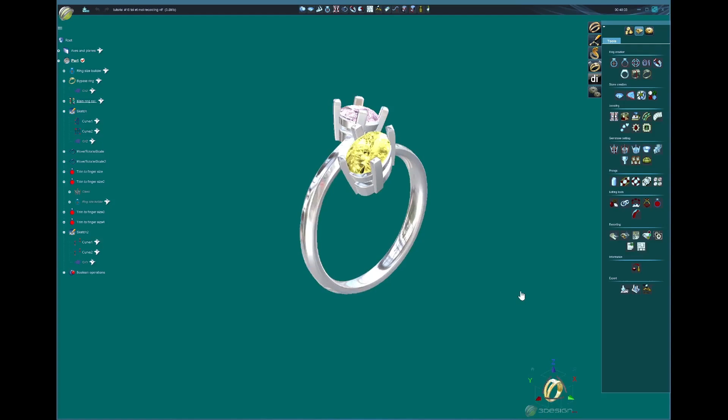Guys, welcome back. Today we're going to design this beautiful twist ring in 3Design. It's a quick and easy project, and along the way you're going to use prongs, rails, ring size builder, bypass ring, and stones. So let's dive in.

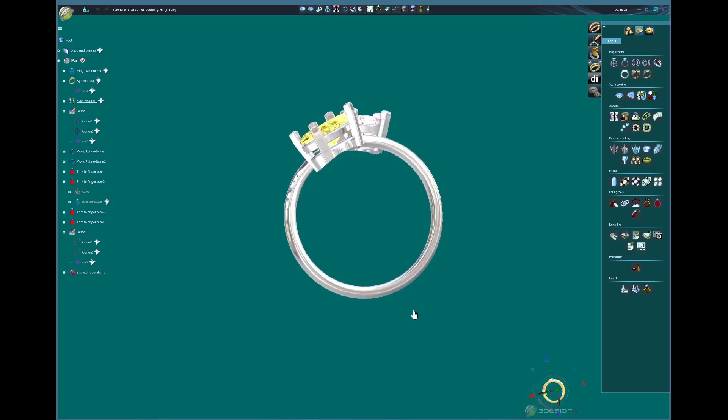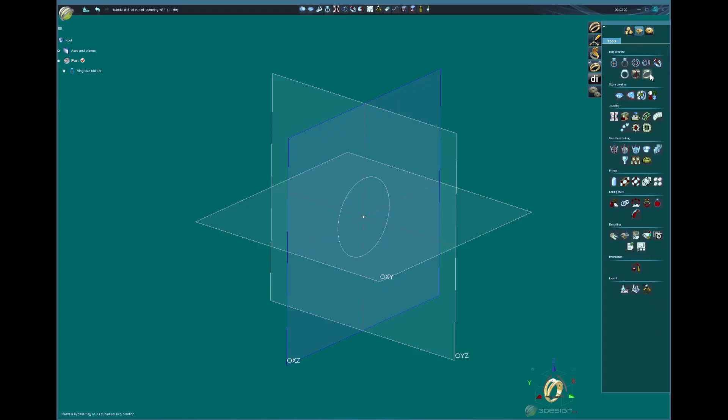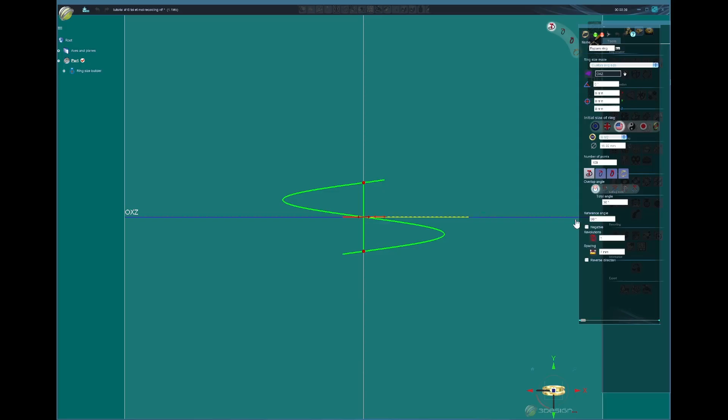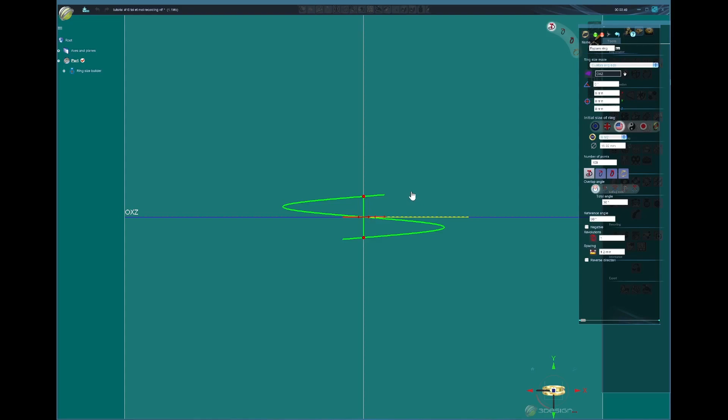Okay, so for this ring we're going to use size 6.5, no top. You click OK, and also in the same plane we're gonna get one bypass ring, also 6.5. It's there for us. And for this bypass ring you're gonna work a little bit on it. In the first step you're gonna bring this a little bit inside, around there, and slightly there.

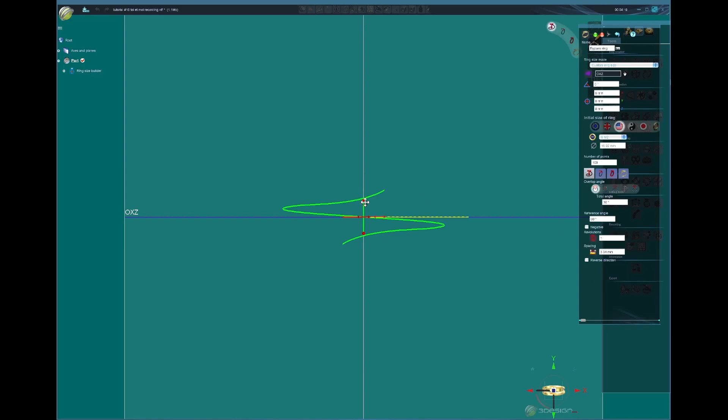In the second tab we're gonna do bending on the end, and we're gonna bring this to make a curve inside and bring a little bit outside. Let's bring this bending a little down. I'm gonna close this a little bit more. We can always open if you need, but for now let's leave it this way. Let me go back here, bend a little more. And I think it's good. And we'll click OK.

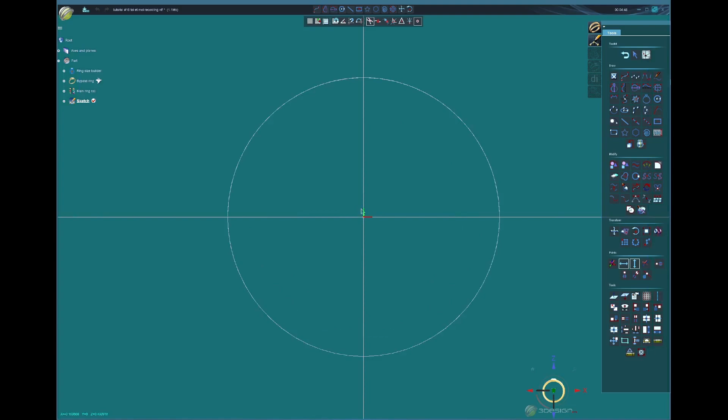So now let's go to this plane, and you're gonna make the profiles for the shank and for the rails. For the shank, I want something like, not a knife completely, but you know, a little bit angled and comfort fit. It's too much. Let's bring it down a little. About there. I think it's good.

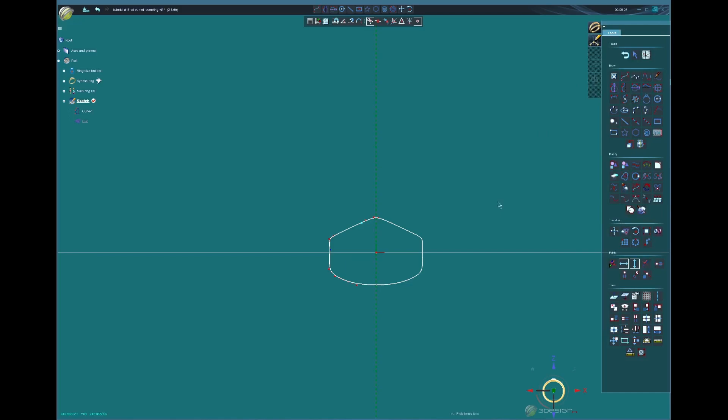Click OK, and also in this tab, let's make the profile for the prong. Sorry, for the belt. I want something a little curved like this. There we go. Okay, now click OK, and you can get out of here.

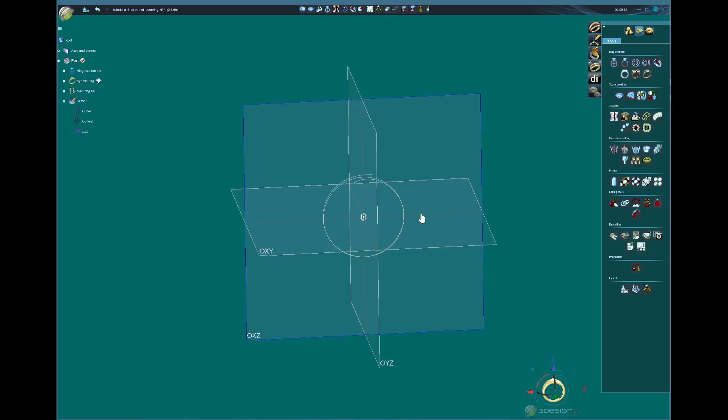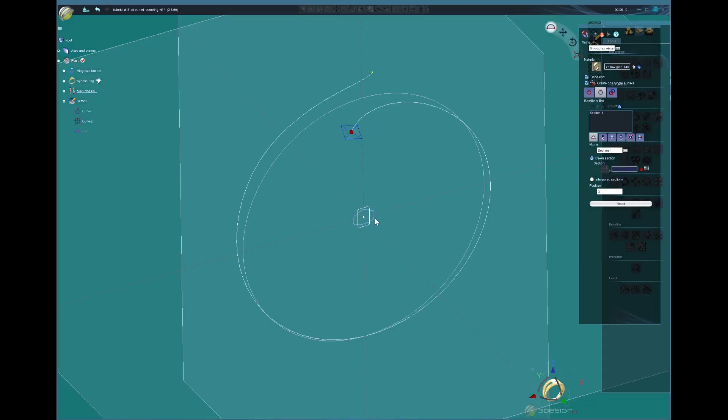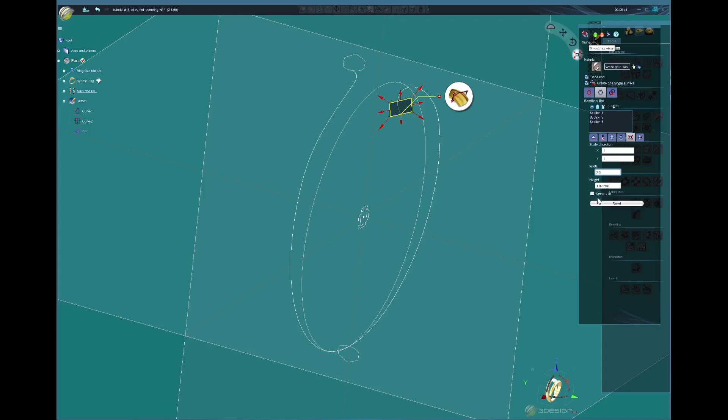So now we're gonna get the bypass ring, and you're gonna come to sweeping wizard, and you're gonna get the second tab and the profile. I want it to be 14 wide. I'm gonna add one more to the end and one more to the middle. Oh, let me check the size. I want the size to be 2.3 width by 1.5, and all of them would be the same. And we click OK. We have our shank.

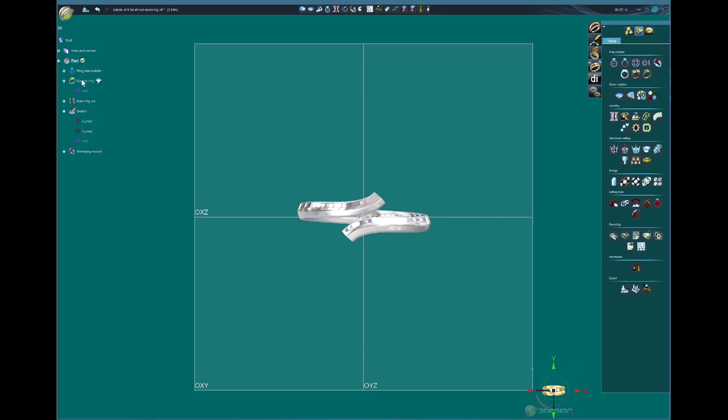The shank is too close to each other. Let's go back here and open a little bit more. The first tab, you're gonna open a little. There we go. All right, now we're gonna add the stone.

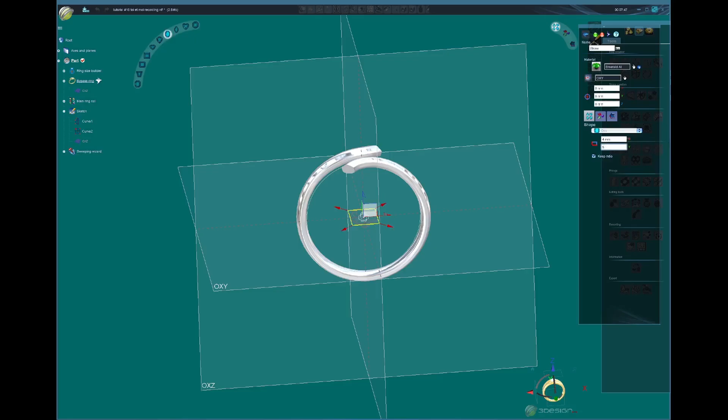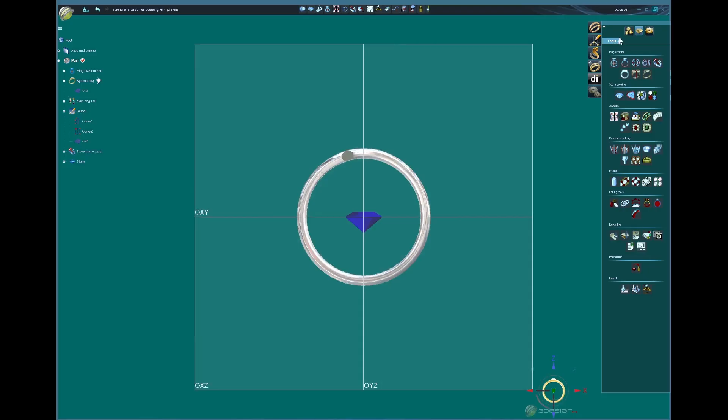You're gonna come over here, and we're going to get one oval. We're gonna do 8 millimeters, and we're gonna get yellow diamond. Since we don't have yellow, we're gonna use the citrine color as a yellow diamond, and we click OK.

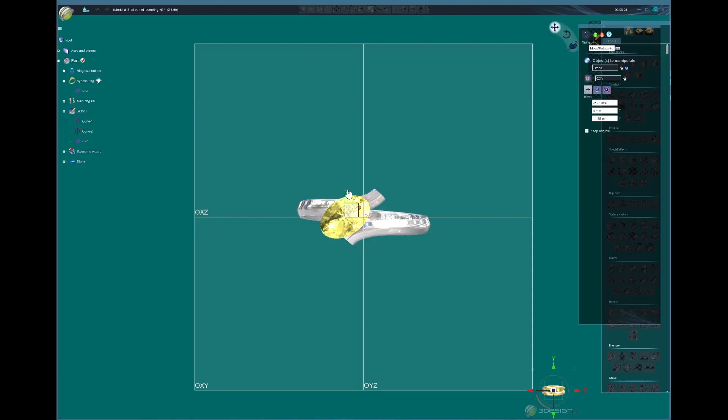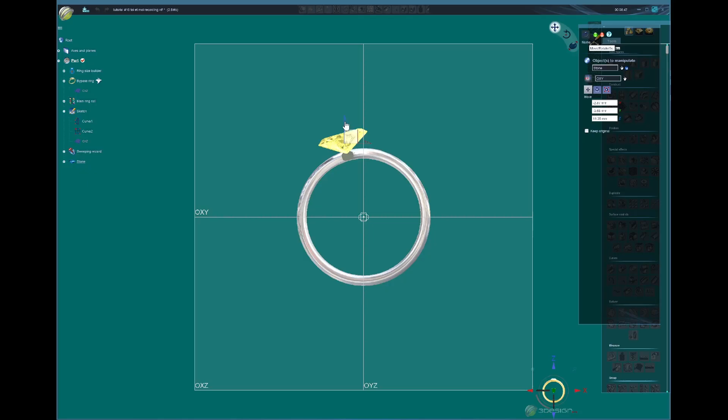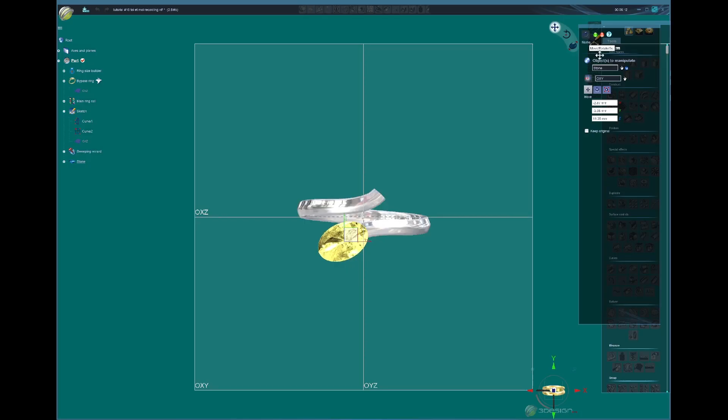We're gonna get this diamond and move up, move a little down. From the top view, we're going to make it a little bit around here, and now we're going to make it down angled, and I think the height is good. You always can bring the height a little up or down. That's good.

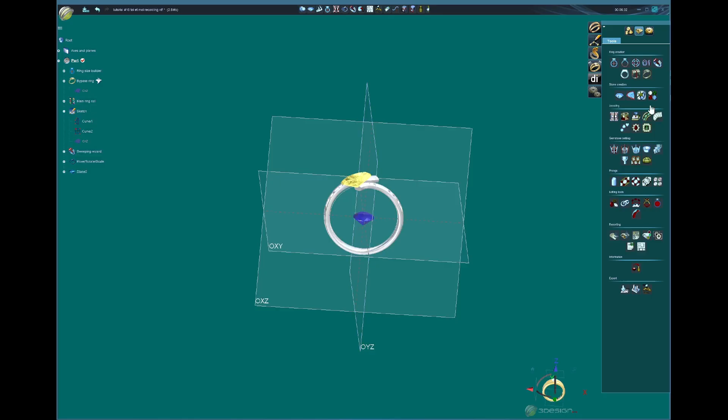And now we're gonna make another diamond. We're going to make a round diamond, 5.2, and I'm gonna have pink diamond for this one. We'll click OK, get the diamond, and you're gonna go up, bring a little out, and that way.

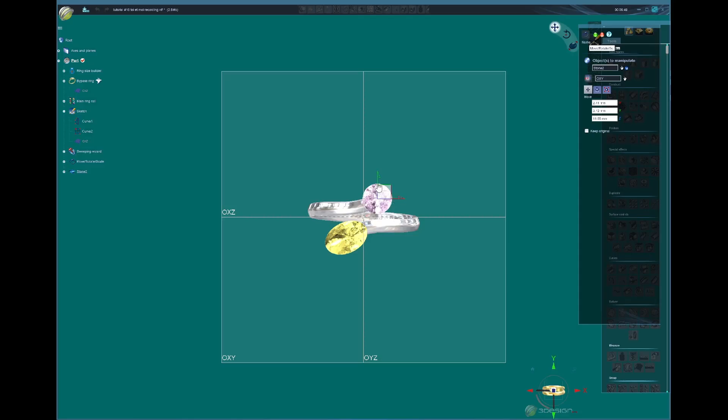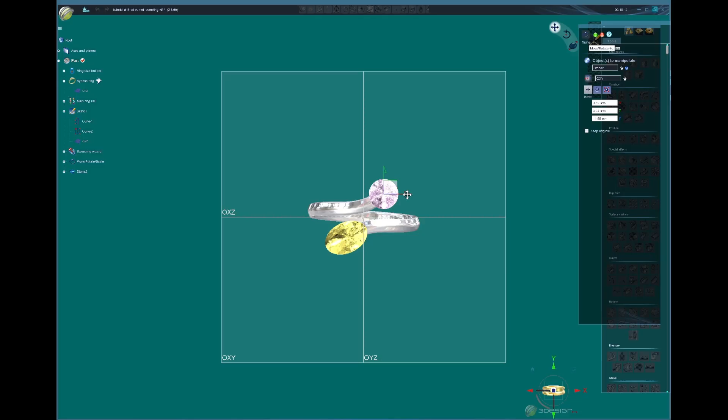We need to get a balance, a visual balance from this side of the ring and this side of the ring, not considering the inside, more the outside of the ring. And we got more or less here. Now, from front view, we're going to bend, top view, that's good. We always can change that too.

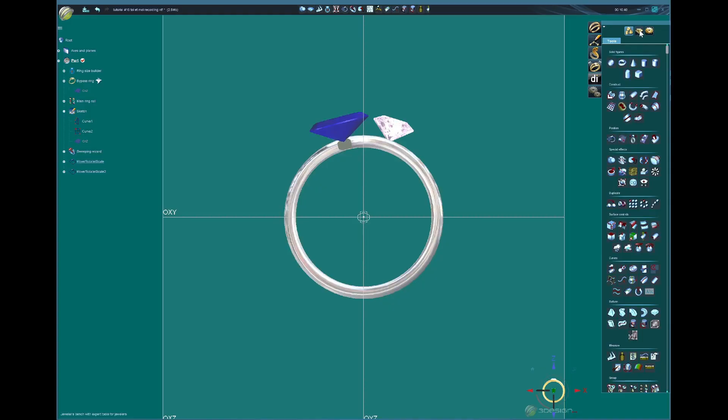So now we're going to start making the bezels for the stones. We click in bezels. For the top bezel, I'm going to get this last tab here, it's custom. So for custom, we're going to get the little hand and the shape that we did for our prong. For that, we're going to have size, click, point, let's do 0.9 and 1 millimeter.

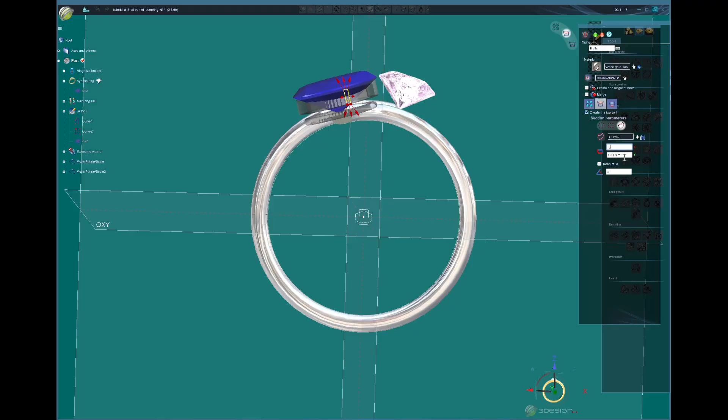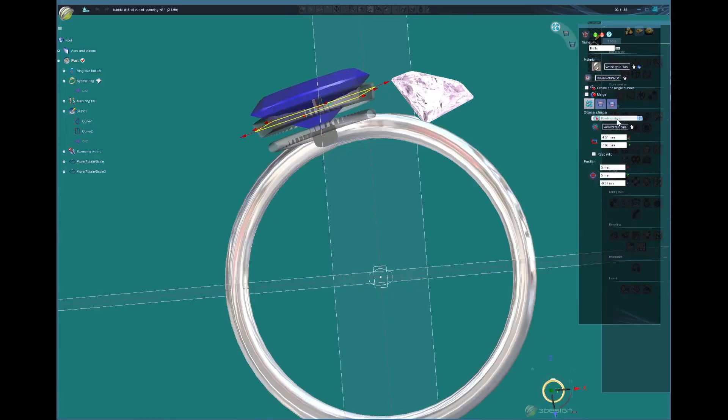And I'm gonna angle that a little bit. Let's angle a little bit inside. And from the top view, let's fix the size. Let me uncheck the ratio. There we go.

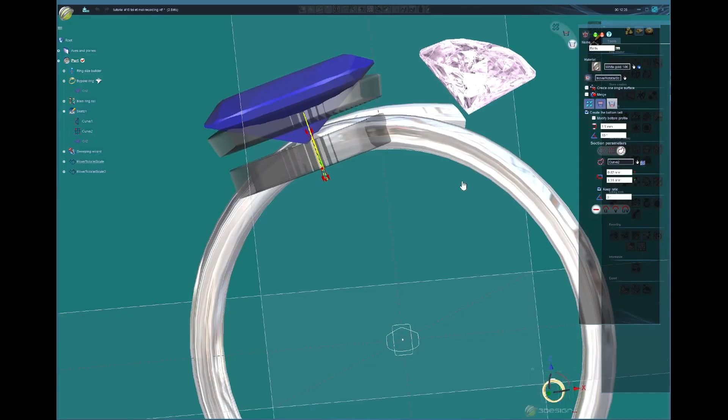And also, let's work now on the bottom. The same thing, you'll come over here to custom. We get the little hand, the profile. We're gonna bring down, I want this profile to get on the top like that. That's good. And we're going to also angle this. Let me see, it's gonna be 0.9.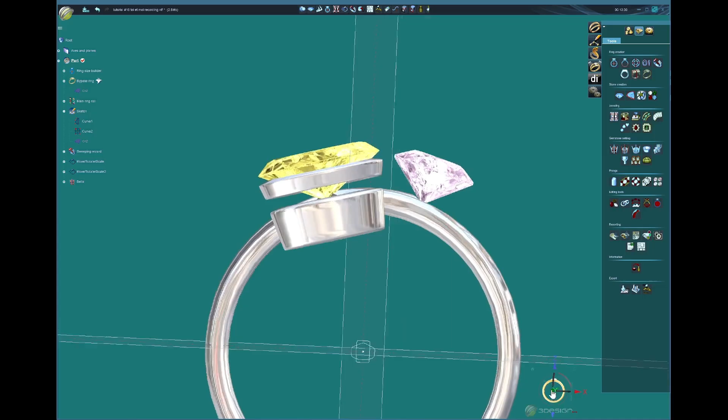And over here, I want it to be longer. That's good. A little bit higher. And let's make it slightly in. And I think it's good. Let's click OK. And we're gonna get this belt and cut, trim to the finger. There we go.

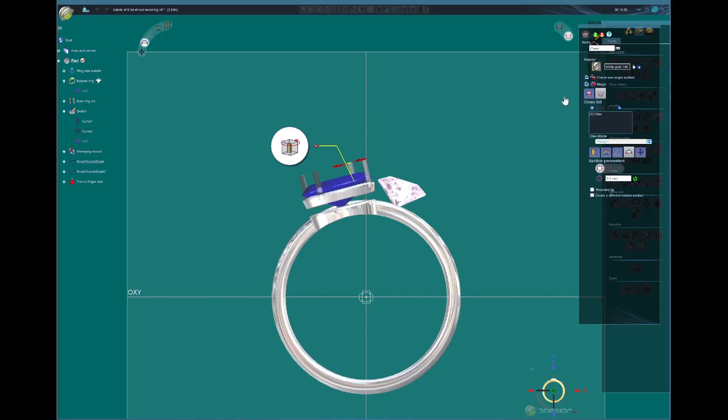Now we're gonna get this stone and we're gonna get prongs, create one single prong and merge. We're gonna do round tip, and for the shape of this prong, I'm gonna use the same shape of the belt. Come over here to the end, get the little hand and the profile.

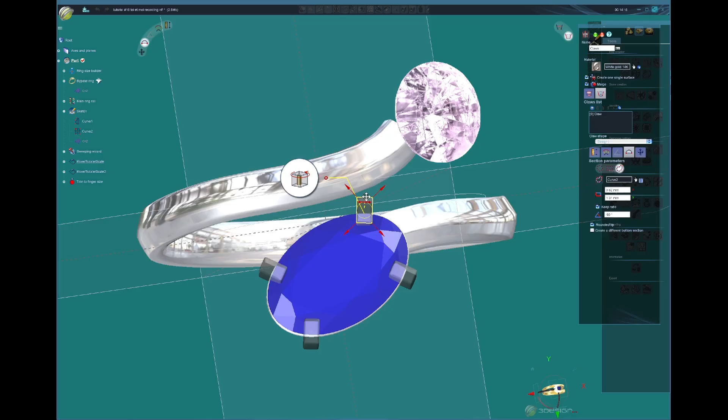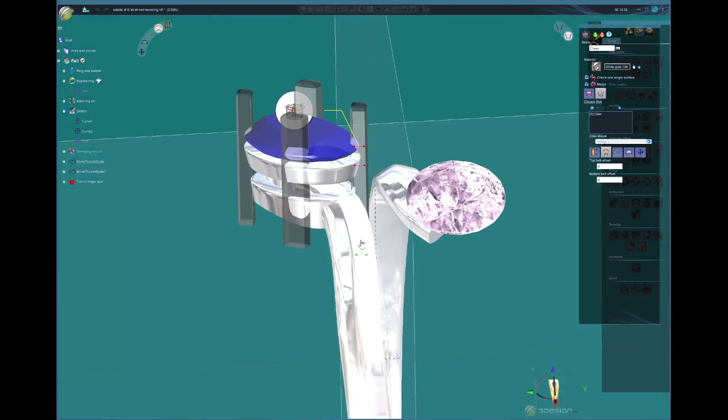I'm gonna turn this prong like that. Let me bring down all the way, a little more, and we're going to bring a little out because I don't want it going in too much into the stone, about there, and we're gonna bring inside.

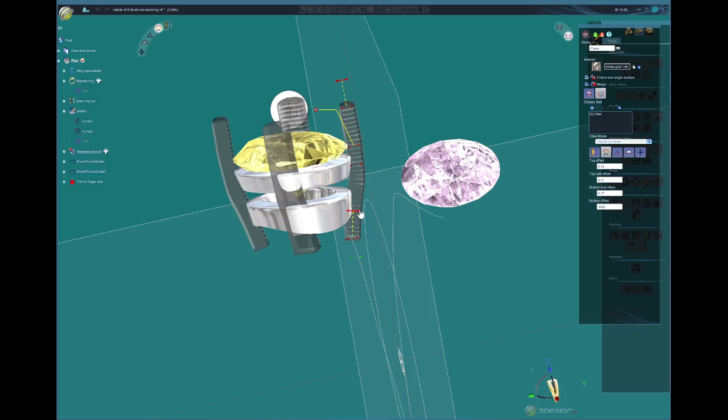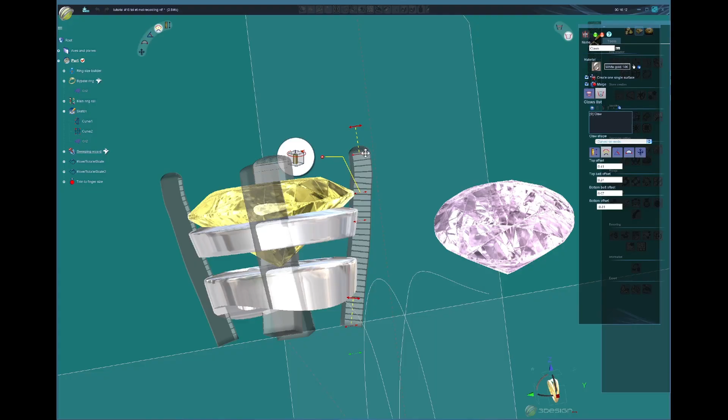I want this going in a little bit, like halfway. Let's bring a little out, down, and this is not nice, so let's bring it out. I think that's good. And over here, guys, you can spend your time fixing the way you like your prong to be.

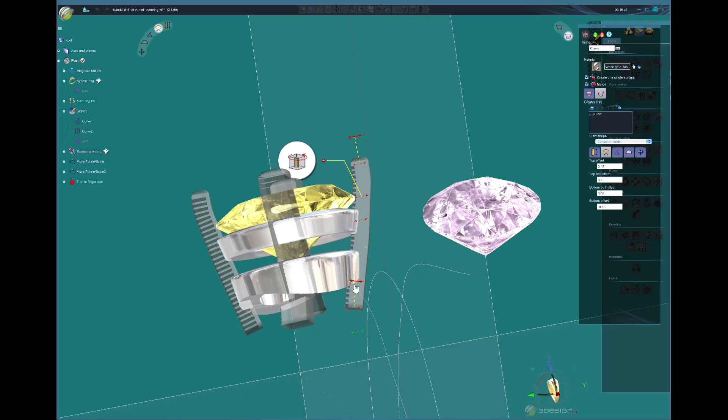I'm not gonna spend too much time because it's going to be boring for you. But I think about there, it's okay. It's okay like that. You click OK, and you get the prongs and clean with trim to the finger. Now we're going to do the same thing with the round one.

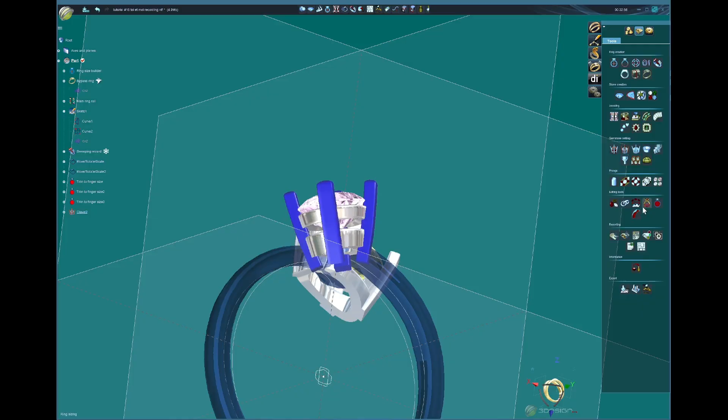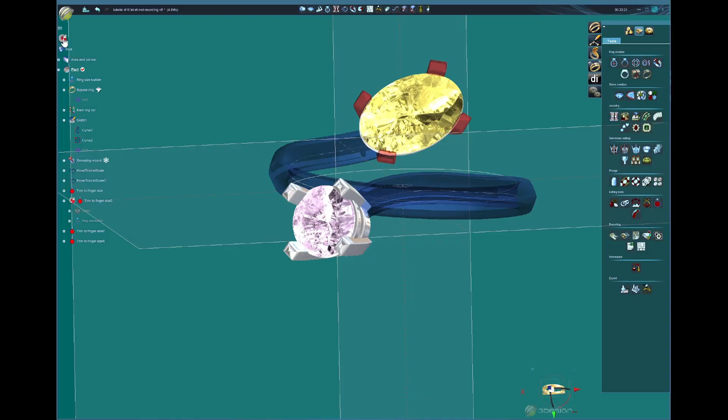And for this one, let's go back to the tree, go back to claw, and make 0.9 by 1.2, and click OK. Recompute in there, same size of prongs. Let's bring this. Okay, so our ring is done.

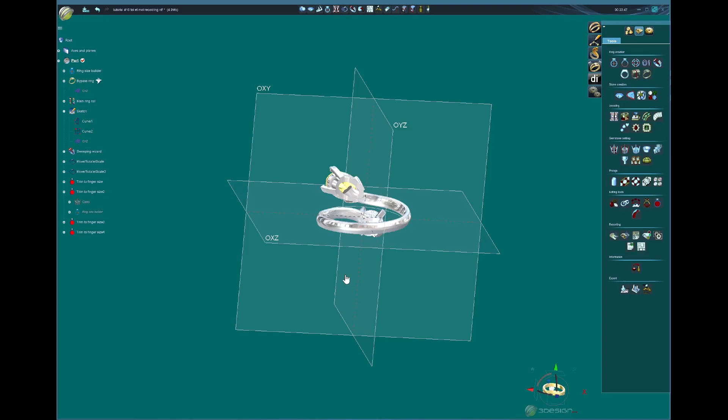Now we just need to clean up this part here. And there's a little bit here I want to clean up too. So there's different ways to clean up. The way that I like, it's faster for me. You click this plane and we're going to get the back of the ring. You're going to get a curve and you're going to trace here because you want to get rid of this part, right? So we're going to do around here. Doesn't need to be precise because this is not going to show.

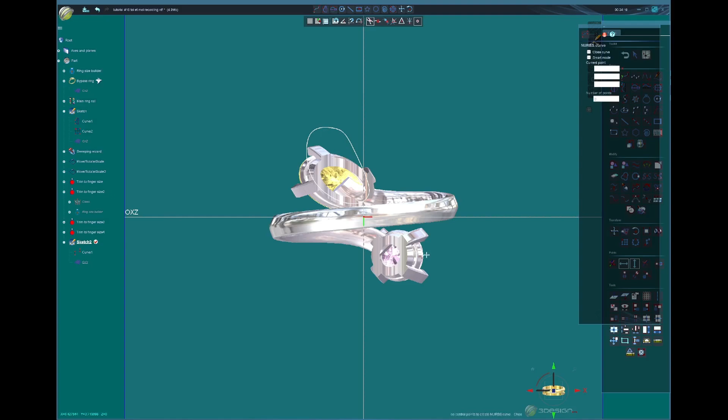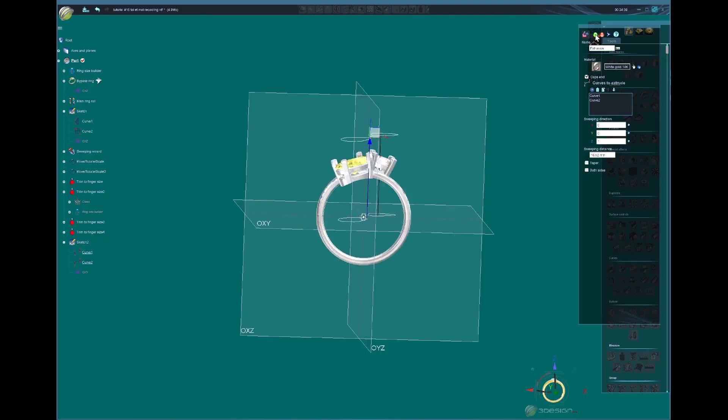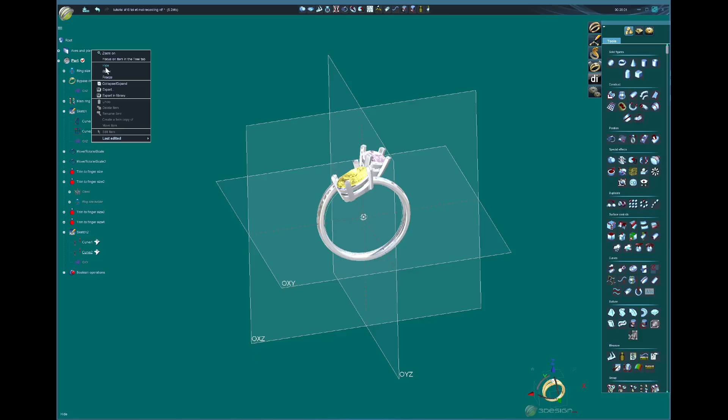And the same thing we're going to do with the bottom. Just going to clean up the part that's showing. We're going to get out of here. We get the two curves and we're going to go up with extrusion and we get the shank, the shapes, and Boolean difference, and it's clean. There we go. Let's hide everything so we can enjoy our work.

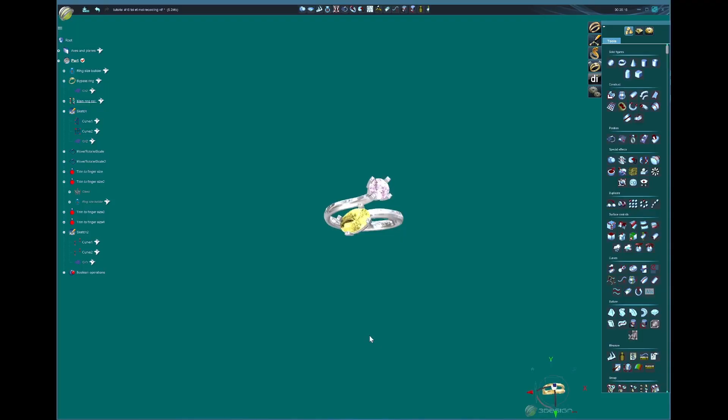There we go. Yeah, guys, so it's a beautiful ring. As you saw, easy to design, and it's very nice. You can do any size, any shape of a stone, and it's a very interesting and fast way to design.